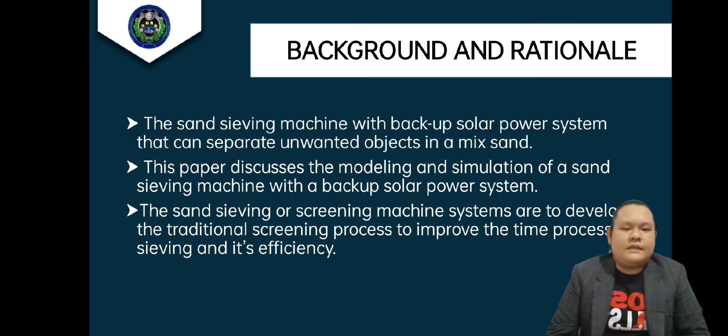Background and rationale. The sand sieving machine with backup solar power system can separate unwanted objects in mixed sand. This paper discusses the modeling and simulation of a sand sieving machine with a backup solar power system. The sand sieving or screening machine system is to develop the traditional screening process to improve the time of the sieving process and its efficiency.

Statement of the problem. A simple hand-operated reciprocating sand sieve with a mesh strainer is the traditional way of sieving. Taking into consideration the advancement in technology and industrialization, a more efficient sand sieve is needed at present. The modeling and simulation of the sand sieving machine will improve the efficiency of the process. For the development of the study, we addressed the following questions.

First, what design parameters should the researchers consider to develop the sand sieving machine with solar backup system? Second, what development strategy should the researchers utilize to ensure that the sand sieving machine with backup solar system will work? Third, what evaluation procedure should the researchers anticipate and address in order to measure the effectiveness of the sand sieving machine? And last, will the solar backup system manage to run the machine?

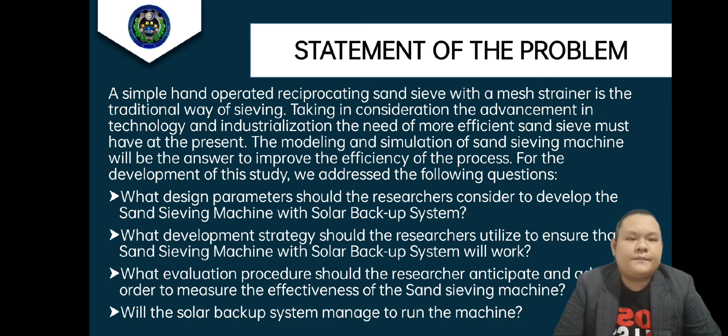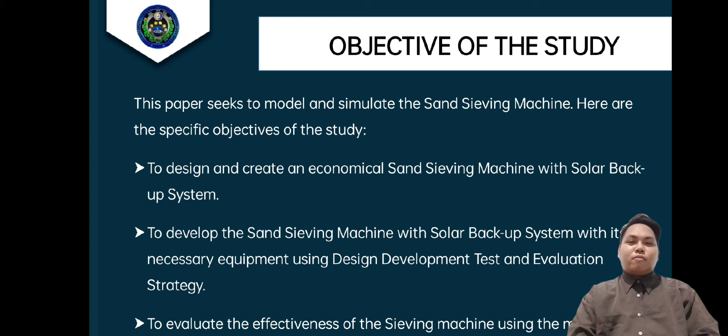For the objective of this study, this paper seeks to model and simulate the sand sieving machine. Here are the specific objectives of this study: to design and create an economical sand sieving machine with the solar backup system, to develop the sand sieving machine with the solar backup system with its necessary equipment using the design, development, test, and evaluation strategy, and to evaluate the effectiveness of the sieving machine using the miniature model.

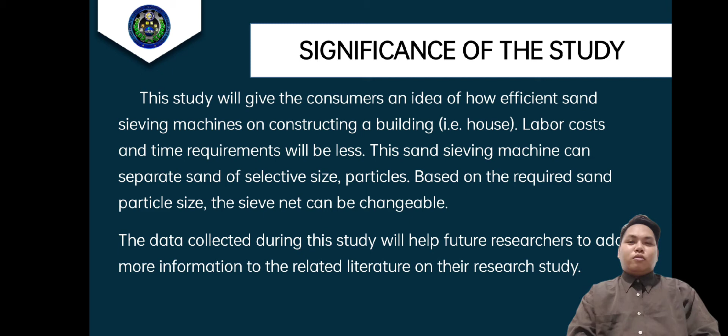Next is scope and limitation. This study focuses on modeling and simulating a sand sieving machine with a solar power system. It works with either dry or wet sand. A 12-volt DC motor will be powered by a 12-volt, 10-ampere DC power supply adapter for the sieving process. A solar power system is added as the backup power system. To simulate the actual sieving machine, a 1:2 scale miniature model will be created.

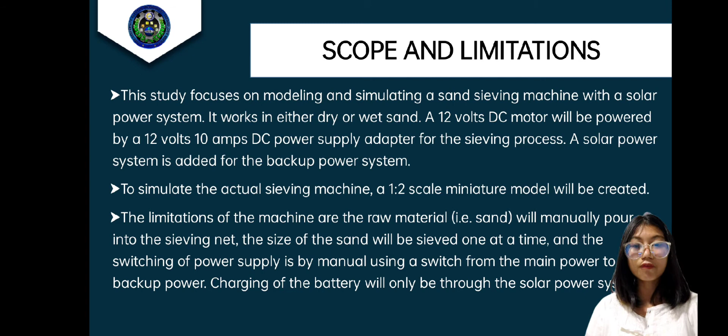The limitation of the machine is the raw material. Sand will be manually poured into the sieving net. The sand will be sieved one size at a time, and the switching of the power supply is done manually using a switch from the main power to backup power. Charging of the battery will only be through the solar power system.

For Chapter 2, the review of related literature. In this chapter, the following related literatures are studied for the development of the project model. First, the design and fabrication of an automatically driven sand sieving machine. The design of the automatically driven sand sieving machine works based on a crank and slider mechanism for the sieving process of the sand, which provides reciprocating motion of the sieving box. The advantage of this study is that time is reduced in the sieving process. In our research study, the idea and use of the slider crank mechanism will be applied in the concept of our sieving process.

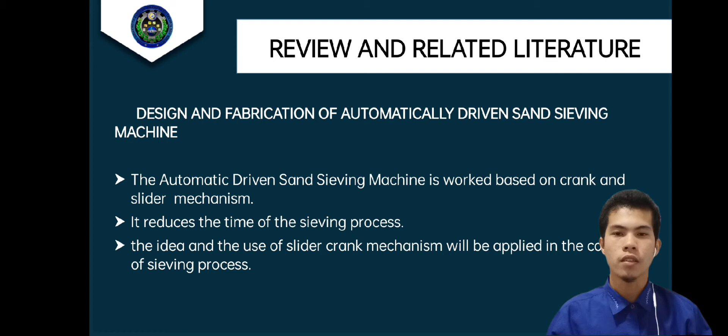Second, design and fabrication of a sieving machine. The design of this sieving machine is to separate screws, nuts, and bolts, depending upon their size and the size of the mesh used.

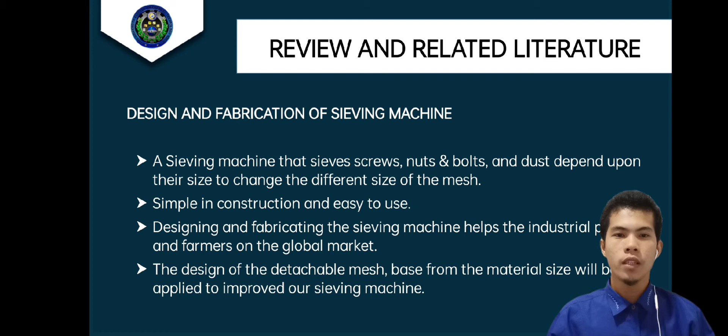The mesh of the machine is changeable according to the size of the object to be sieved. The advantage of this machine is that it is simple to construct and easy to use. The concept of changing mesh was applied in the design of our sieving machine model.

Third, automatic sand sieve. In this study, a motor-driven sand sieving machine is designed for the process of sieving sand materials into finer grains. The advantages of the machine: it works faster and is more easily manageable than manual work. The idea of the motor-driven system will be used in the sieving process in our project.

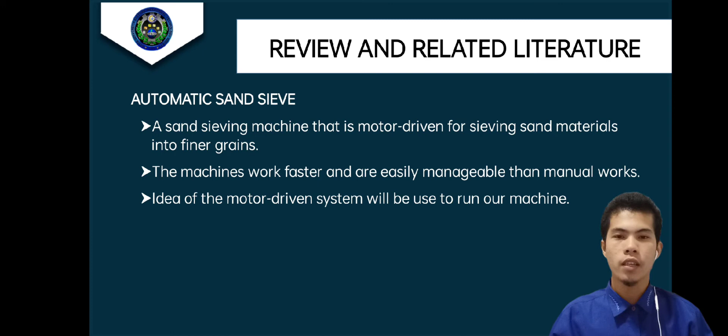Fourth, solar power operated sieving machine. The solar power operated sieving machine is designed to separate grains from unwanted particles like stones and small pieces of wood. It uses solar energy as the power source of the machine. The advantage of this study is that it is a cost-effective and environmentally friendly machine.

In our project, the concept of using solar energy as a source of power is applied as the solar backup system of the model. For our Chapter 3, the methodology, we discuss the research design.

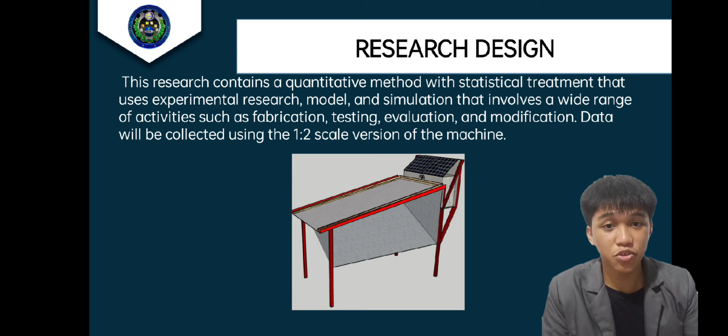This research uses a quantitative method with statistical treatment that uses experimental research, model, and simulation, involving a wide range of activities such as fabrication, testing, and evaluation. Data will be collected using a 1:2 scale version of the machine. At the bottom of our research design, you can see the prototype of our model, which is the miniature model of the project. To assemble and run the machine, we address the following components.

Mesh holder, which holds the mesh strongly so that the mesh can sieve the sand perfectly. Mesh frame. The mesh frame is made up of wood and tin angle bar where the mesh holder will be input. DC motor. A 12-volt DC motor is used in the model to convert rotary motion to straight line motion with the help of a crank and connecting rod for the reciprocating motion of the mesh frame.

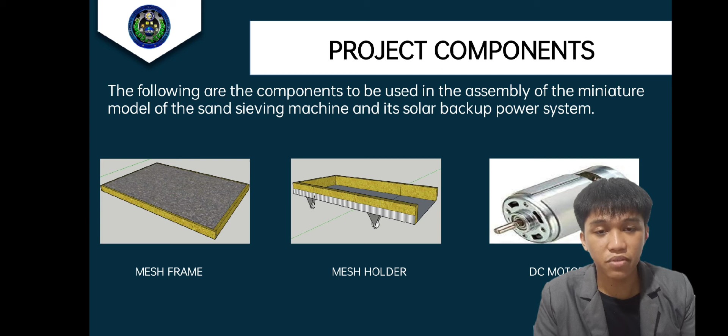Caster wheel. It is attached at the bottom of the mesh frame. The purpose of the wheel is the smooth movement of the mesh frame while moving on top of the main frame. Adapter. A 12-volt DC adapter is used for the main power of the DC motor to convert the 220 volts input of the outlet into 12 volts output, compatible with our 12-volt DC motor.

Solar panel. A 12-volt, 6-watt solar panel is used for the solar backup power system. Battery. A 12-volt, 4-amp battery is used for backup power when main power is unavailable. Solar charge controller. A regulator for the solar battery that prevents overcharging of our backup system battery.

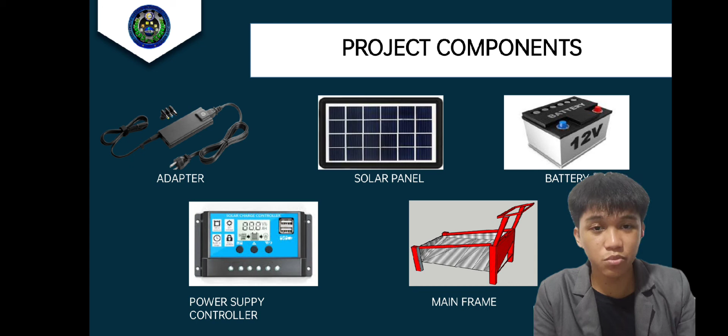Mainframe. It holds all the different parts together and keeps them in their appropriate position. It is made up of steel angle bar and rectangular steel tube. Research instrument. The research instrument of the project uses a quantitative method in gathering data for testing and evaluating the machine. For the apparatus, SketchUp Pro software will be used to design the virtual prototype, and Excel 2016 software to acquire the average from the data collected by testing and evaluating using one-way ANOVA or F-test.

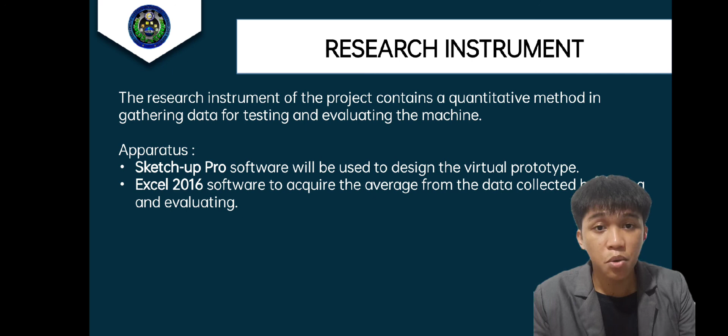Research instrument. The research instrument of the project contains a quantitative method in gathering data for testing and evaluating the machine. And the apparatus we use is the SketchUp Pro software will be used to design the virtual prototype. Excel 2016 software to acquire the average from the data collected by testing and evaluating using one-way ANOVA or F-test.

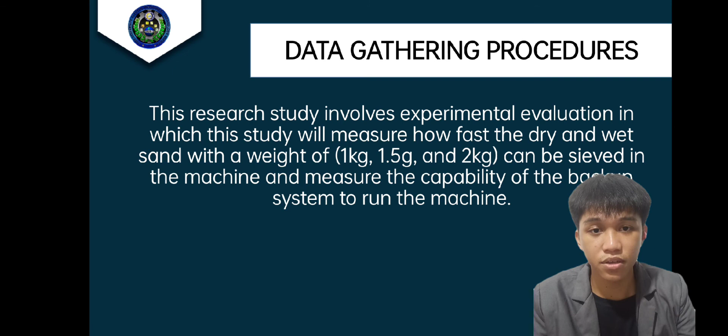Data gathering procedure. This research study involves an experimental evaluation which will measure how fast dry and wet sand can be sieved in the machine with selected weights of 1 kg, 1.5 kg, and 2 kg, and measure the capability of the backup system to run the machine using these selected weights. As for the research setting, the study will be conducted at Barangay Gusa, Purok 2C, Cagayan de Oro City.